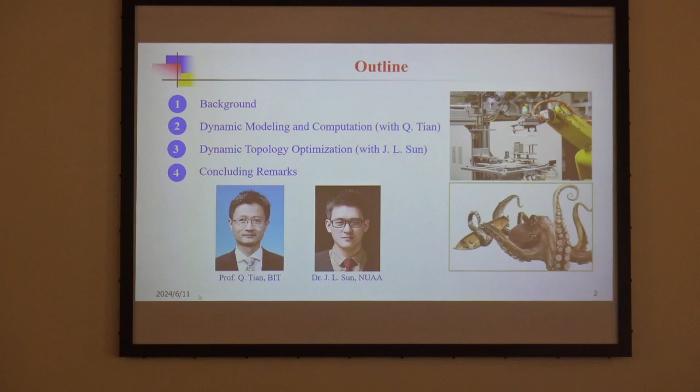As you know, conventional machines are composed of rigid components such as gears, shafts, and bearings to realize the desirable operation. However, sometimes those rigid components do not work very well. For example, in the case of a rigid manipulator of an industrial robot like this one, you need to well control the contact force if the manipulator is going to grasp a fragile workpiece. So inspired by the octopus, nowadays we are studying the soft gripper, soft manipulator, as well as soft machines, since more and more soft materials have become available.

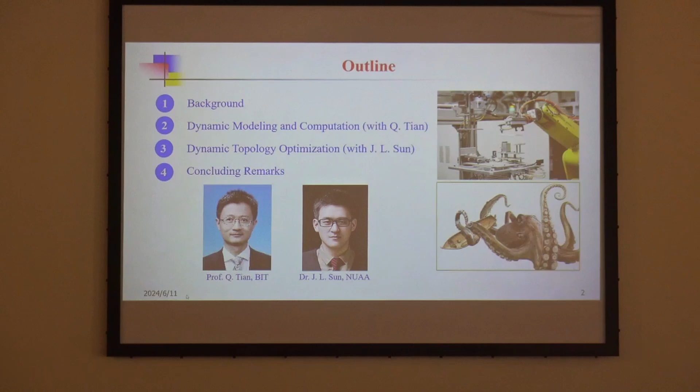Today I'm going to talk about the study on the dynamic modeling and computation with collaboration of Professor Tian in BIT and dynamic topology optimization with Dr. Sun in NUAA. Now let me begin with the basic introduction of the background. From the school name, you can guess that my lab has been focusing on aerospace structures, in particular with more and more soft materials and increasing demands for soft structures. So we are looking for the possibility to apply nonlinear dynamics to those soft machines.

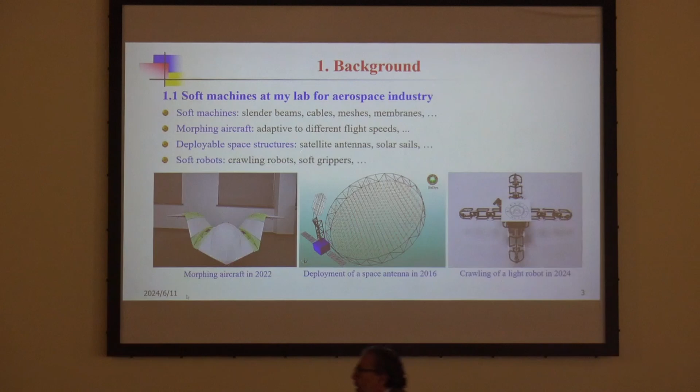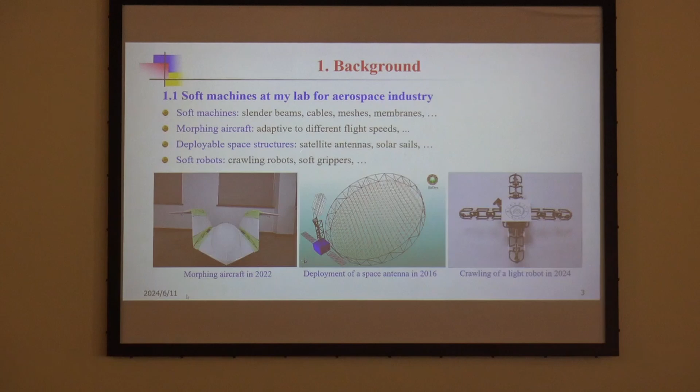For example, the left video shows you the morphing process of an aircraft adaptive to different flight speeds and different flight missions. And in the middle, this is the communication satellite in blue color. This satellite has not only very flexible solar panels, but also a very large antenna. The middle picture shows you a communication satellite having a huge antenna for telecommunication. And this antenna is so large that we cannot launch it directly. So we need to stow it into a small volume during the launch and then deploy it on orbit.

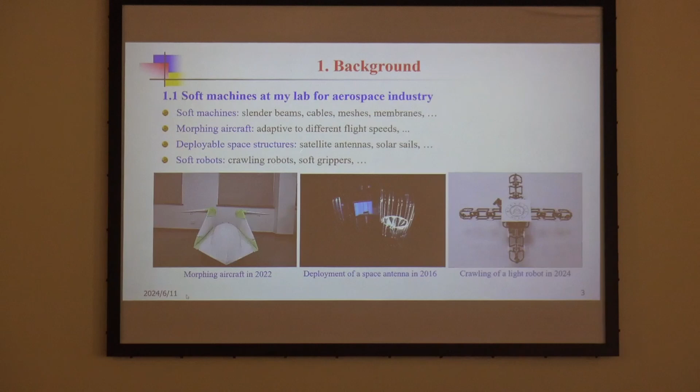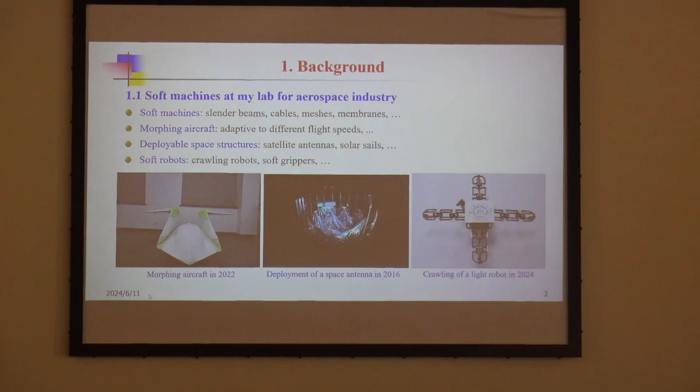To guarantee the successful deployment of the huge antenna, we did some experimental work at my lab. And here I can show you the deployment process, and you can see that the soft mesh is falling down due to the gravity. You may wonder, if the gravity vanishes on orbit, what will happen? Whether the soft mesh is falling down or goes up, left or right. Nobody knows. Later on, I will address this issue in the second part of my lecture.

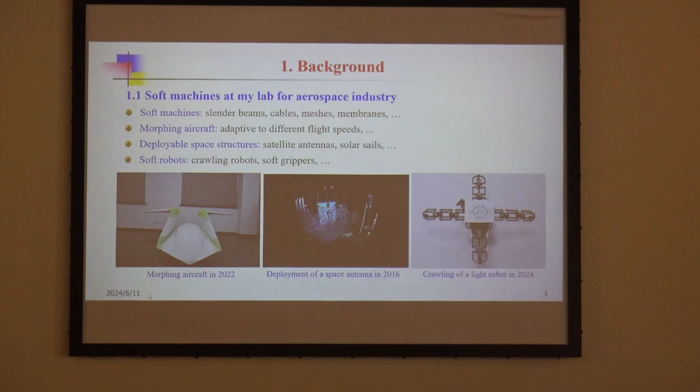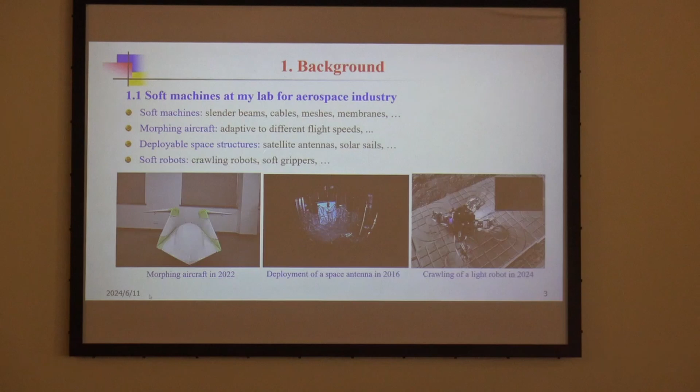And the right picture shows you a light robot very recently made by my students. This light robot is not only made of soft materials, but also subject to topology optimization to greatly reduce the weight to less than, say, 15% compared with the conventional one. So I'm going to talk about the studies for those products, and then I need to solve some great challenges.

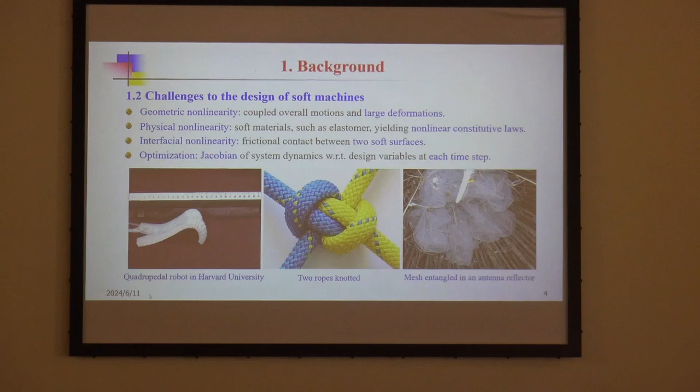So to deal with those great challenges, we need to have proper dynamic modeling and efficient and safe computation. And then based upon these techniques, it's possible for us to conduct the topology optimization, because these computations are very time-consuming due to those nonlinearities. This is the major topic today. In my lecture, I'm mainly focused on the first challenge, what I mean is geometric nonlinearity. However, I will touch upon the second one and third one in some case studies.

Okay, let's move to the second part of the lecture, talking about dynamic modeling and computation. Basically speaking, we have two kinds of methods to describe the overall motion and deformation of a flexible body. It depends on what kind of problem you are dealing with, and on your previous experience. For example, if you are in rigid body dynamics, maybe you are interested in the first type. However, people in the field of continuum mechanics may be interested in the second one. Let me give you some basic introduction.

First of all, if your body is subject to small deformation and your overall motion has a low speed of rotation, in this case you can establish a floating frame of reference, just like the top right picture. For example, you can describe the dynamic configuration or the movement of material point P positioned by vector R. And in this case, you can decompose the dynamic configuration into two parts. One is the overall motion, including the large rotation of your floating frame of reference, or called body frame. And the second part is the small deformation of the body with respect to the motion of your body

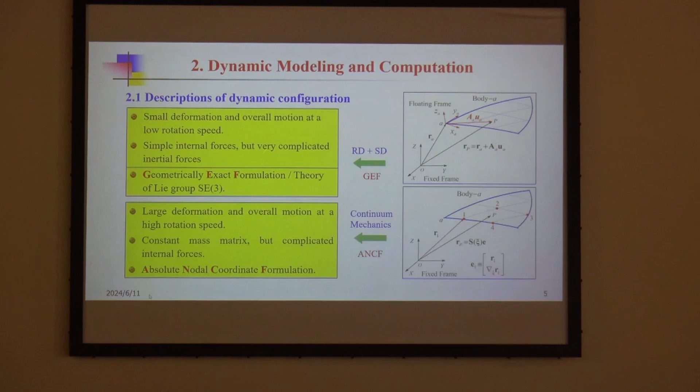Now let me talk about the second approach, the second description, which is familiar for people in continuum mechanics, because here we do not need to distinguish the overall motion and large deformation. We can use the concept of dynamic mapping between the initial configuration and current configuration, just like Professor Rugri introduced to us. And of course, if you describe the motion of a material point P here, you can use the motion of neighboring nodes. Here, I need to emphasize that this motion is absolute motion because we do not introduce any floating frame of reference, but use a fixed frame only. So this gives the idea of the absolute nodal coordinates. Here, coordinates means motion. So I call it ANCF. Today, the major content of the lecture is based upon the ANCF, so I'm going to explain it in detail.

Okay, to understand the basic idea of ANCF, let's look at the simple case of a two-dimensional slender beam. We are going to establish a nonlinear finite element method for the beam. So it's quite natural for us to look at the motion of material point P, positioned by vector R. Recalling our previous experience in the conventional beam element, we can certainly introduce, say, the cubic interpolation to describe the motion of this point P. So in matrix form, we describe R equal to matrix S multiplied by vector Q.

And here, the entries in this matrix S are the same as those in the conventional beam element. However, the coordinates in vector Q are quite different. It not only includes the conventional nodal coordinates here, for example these two and these two. In addition, we have four nodal slopes to describe or to replace the deflection angles theta i and theta k in the two nodes of your beam element.

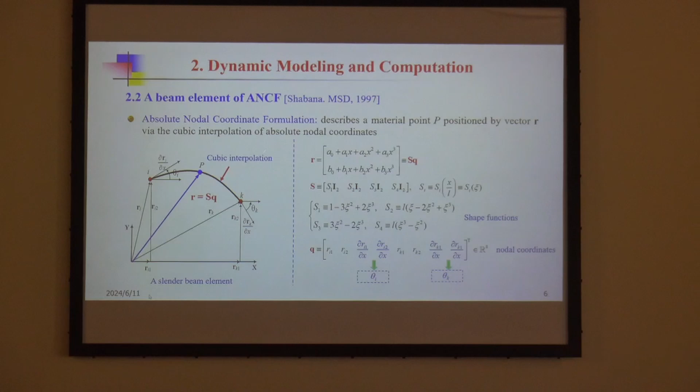Later on, I will explain the meaning of this replacement. Before going ahead, please keep in mind an important expression here: R equals S multiplied by Q, for later use. Okay, now let me talk about the replacement of slope with original deflection angle.

Actually, if we look at the left end of the node, there are two slopes. We can put these two terms into a matrix. The second matrix tells you that it is nothing but the rotation matrix of the normal direction of the cross-section of your beam element. So very simple geometry. However, in the conventional beam element, we use theta rather than sine theta. But if theta is small enough, then sine theta is equal to theta, and cosine theta is equal to 1. So that's what this approximation means.

This tells us that the ANCF can well describe the large deformation because we do not introduce any approximation in the nonlinear case. Okay, this is the first point. What about the overall motion of the beam element? That's quite easy for you to verify. You can simply let your beam element undergo a large overall motion, including translation and rotation. Then it's easy to verify that the change of the nodal coordinates is nothing but the rigid motion of the beam element itself. So this way, I can say the ANCF beam element can well describe the coupled overall motion and large deformation.

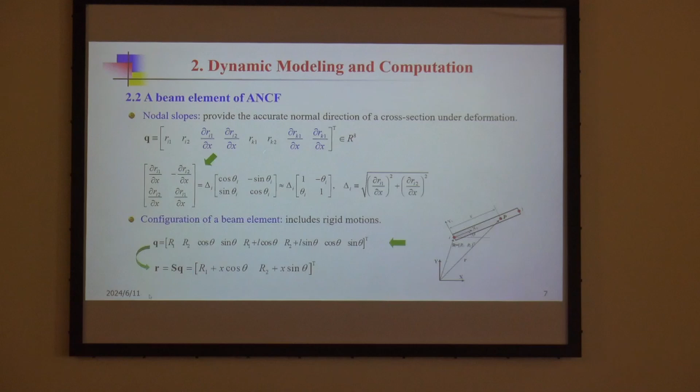That's very important. The most important expression is here: R is equal to S multiplied by Q. Then I will use it repeatedly. Following this idea, we have established, say, the three-dimensional beam elements, the thin shell element, and the solid elements, etc. For example, the 3D curved beam element we developed can be used to model not only slender beams, but also cables, meshes, etc., that are very important components in aerospace engineering.

And the thin shell elements can well describe thin plates, shells, membranes, etc. The most complicated finite element we established is the solid element here with variable length. Why do we need the length variable? Because later on, when I talk about topology optimization, we don't know the shape of the structure, the component, or even the machine. So we require the element to be changeable. In this case, each element has 8 nodes, and at each node there are 12 nodal coordinates, plus 2 other coordinates to describe the variation of the length.

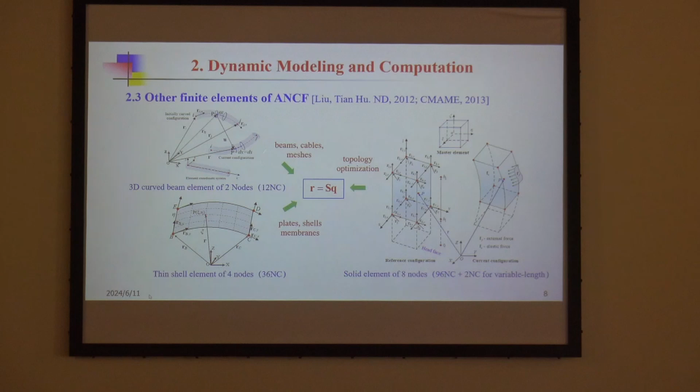Even though we have many kinds of elements, all of these elements yield this important relation: R is equal to S multiplied by Q. This is a very important expression. Then I will use it in the next slide. Okay, after we have this description of movement, we can easily derive the kinetic energy, strain energy, and the virtual work of other forces. Then we substitute these 3 quantities into the Lagrange equation of the second kind. Then we have the dynamic equation of a single beam element, like this one.

Here, I need to emphasize these 2 quantities. First, let's look at the matrix M. Because R is equal to S multiplied by Q, and S, the shape functions of the beam element, have nothing to do with time, the time only appears in Q. So we have R dot becoming Q dot, and finally you will see that M, the inertial matrix, has nothing to do with time. We have a constant mass matrix. This is the most important advantage of ANCF.

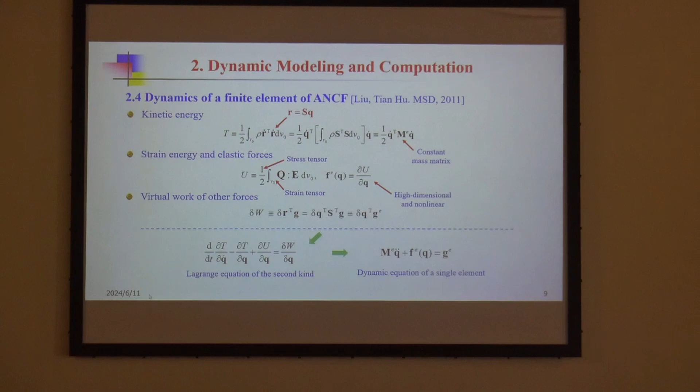However, when we get the benefit, we must pay. Pay for what? Pay for the complicated expression of the elastic forces. Here we have the strain energy for the elastic forces, where Q is the stress tensor, the second Piola-Kirchhoff stress that Professor Rugri just mentioned, and E is the Green strain tensor. So it's easy to imagine that the vector of elastic forces should be very complicated because everything is nonlinear. To deal with the problem, we need to use some basic knowledge of continuum mechanics.

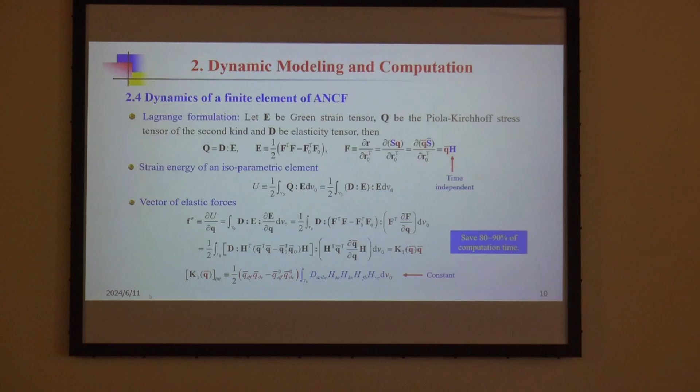During this process, maybe we need to do some tensor mathematics. However, it's not very difficult. The final result is important. After the factorization of all the quantities associated with time out of the integration, then it's easier for us to compute this integration before we start dynamic analysis. This gives you the opportunity to save a great deal of time, say 90% of time, and we only need to update the quantity related to Q bar. This is the importance of continuum mechanics. Okay, save the percentage of the computational time.

Well, regarding the machine, besides the soft components, the machine may have different kinds of joints, such as cylindrical joints and spherical joints described by algebraic equations. So after we assemble all those components and joints together, we will have a set of differential algebraic equations like this one. The first line gives you the dynamic equation in the form of differential equations, and the second one gives you an algebraic equation describing the constraints of those joints. Anyway, we need to solve this set of equations, or called the DAE, numerically.

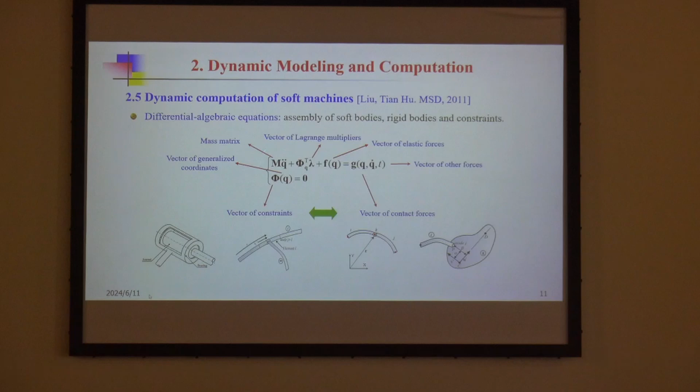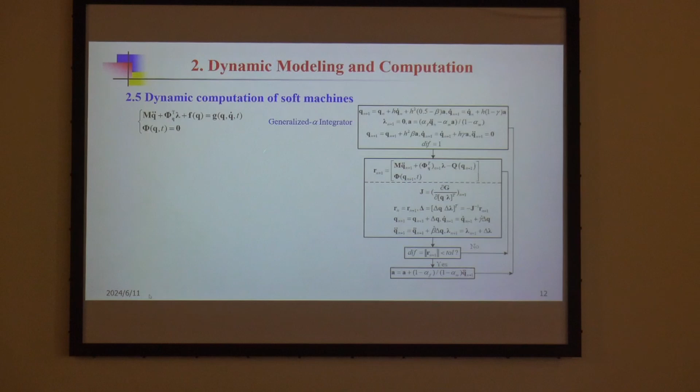Now there are several approaches available for solving this kind of DAE. Among them, I prefer to use the generalized alpha integrator. It's a kind of generalization of a well-known numeric approach. It has an important feature of easier control of numerical dissipation. Based upon the generalized alpha integration and Newton-Raphson iteration, we can transform the problem of solving a set of DAE into a simpler problem of solving a linear algebraic equation step by step in the time domain. And usually we solve this equation for delta lambda first, that's the variation of your Lagrange multipliers, and then get delta Q, that's the variation of your absolute nodal coordinates.

Of course, you can speed up this process. For example, we can remove all the internal degrees of freedom of a single component by means of the substructure method. In addition, you can also introduce parallel computation to speed up the process of solving the linear algebra. The combination of these two skills can give you the opportunity to further reduce the computational time by 90%. Remember, the first simplification reduces it to only, say, 10%, and now 10% of that. So totally, we only use, say, 1% to complete a very complicated problem.

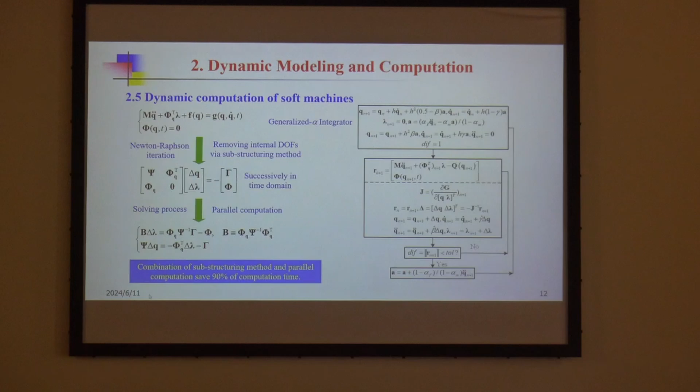Okay, now let me show you some numerical validation of the new finite element methods. We made some comparisons of the newly proposed beam elements with the solid elements in commercial software. The right figure shows you the comparison of the newly developed beam elements for beams with an I cross-section, a rectangular cross-section, and a hollow rectangular section, compared with the solid elements in ANSYS. And the left picture shows you the comparison between our result and the solid elements in Abaqus. In Abaqus, we use 1,600 solid elements to simulate the large deformation of the beam. This approach works only for, for example, 3 or pi radians. It means half of a rotation. However, the newly established beam elements plus the proposed approach of solving DAE can work for, for example, up to 45 radians, much larger than the commercial software. So I can say this approach is superior to the solid elements in Abaqus and saves you a lot of computational time.

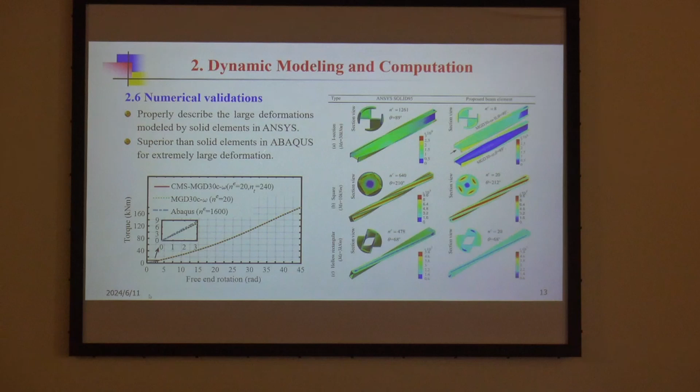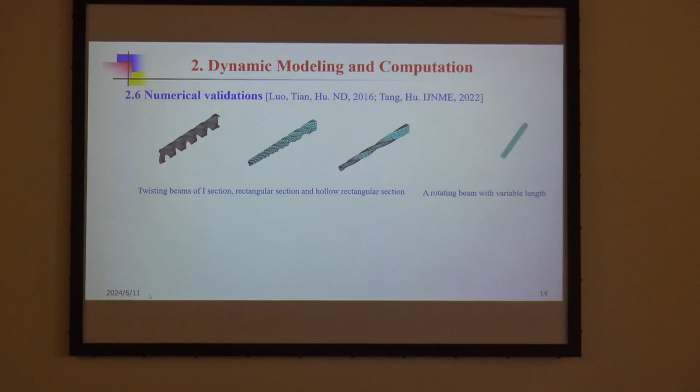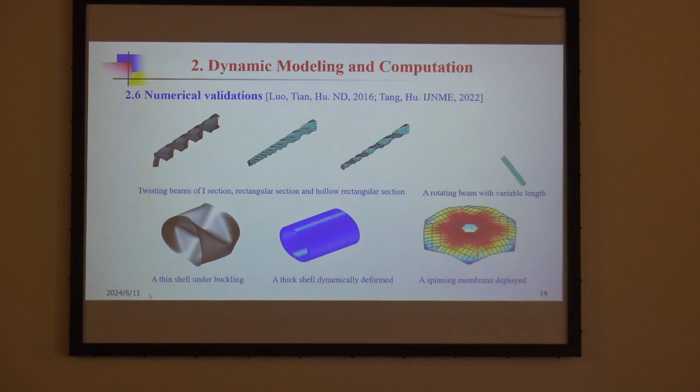Here, let me show you some, say, dynamic deformation. This is the twisting beam of I section, rectangular section, and hollow rectangular section. And here is the spinning process of a rotating beam with a variable length. This is a quite important case for the space industries. And here is a thin shell subject to buckling, and a thick shell subject to dynamic deformation, and the spinning membrane deployment for the case of solar applications, solar energy power generation. Okay.

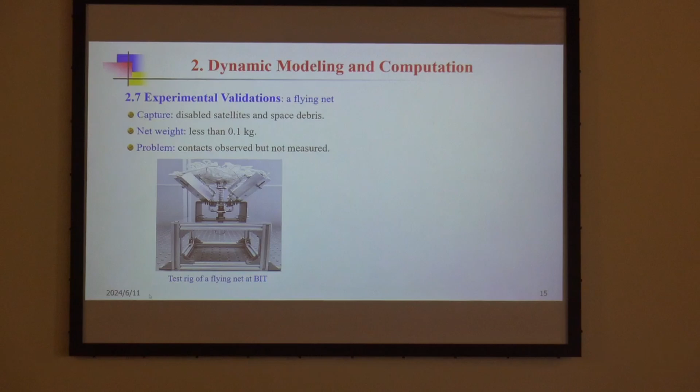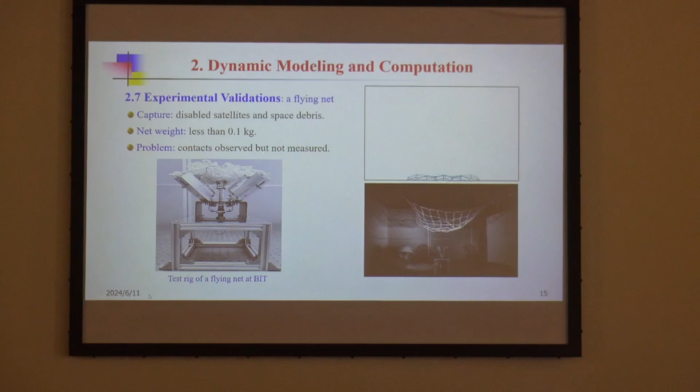Furthermore, let me show you some experimental validation. Here is the simple test rig developed at my lab. This is the flying net, very useful for capturing, say, disabled satellites or space debris. And the net is composed of a lot of strings and very, very light. And let me show you the videos. Unfortunately, the two videos are not synchronized, but on my own computer, the net is flying synchronously in numerical simulation and experimental studies. This is a relatively easy computation. You may wonder whether I properly describe the contact between these strings. Yes, that's a very tough problem, not only for computation, but also for measurement.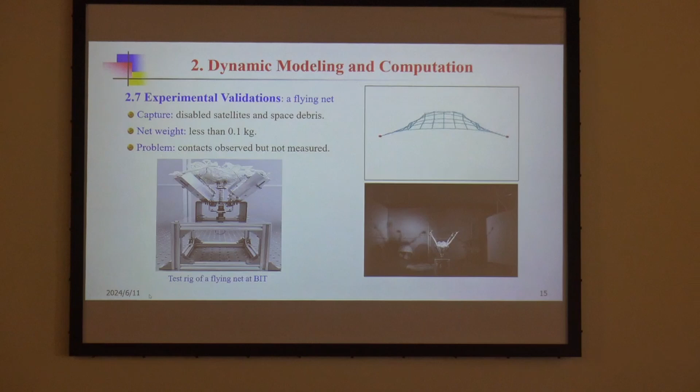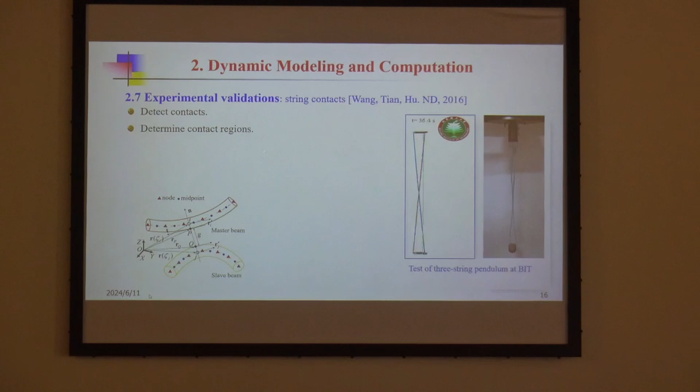So let me show you a relatively simple test rig. And here the video shows you that the motor drives the top disk to spin, and the bottom disk connected with 3 strings rotates too. And the motions of these 2 disks are not synchronized because of the inertia of the bottom disk. So you can see the 3 strings get in touch from time to time and have frictional contact. How to deal with this problem in computation? We establish the beam model for those ropes, and we can detect whether they get in contact according to the distance, say, determine the contact region after they get in contact. As I mentioned before, the contact now is not the, say, point-to-point contact, but region-to-region contact between two soft bodies.

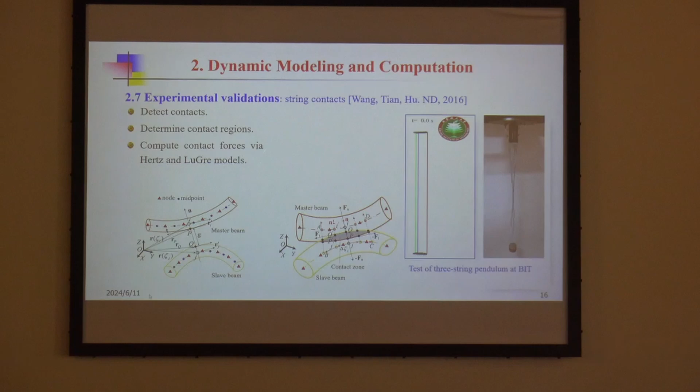So we need to accurately determine how large the contact region is, and then we can compute the contact forces. Say for the normal force, we use the Hertz theory, and for the tangential force, we use the LuGre model to well describe the static friction, in particular the well-known stick-slip effects. This figure shows you a comparison between the angular velocity of the bottom disks, and you can see the computational results and experimental results get very good agreement, confirming the computation of contacts.

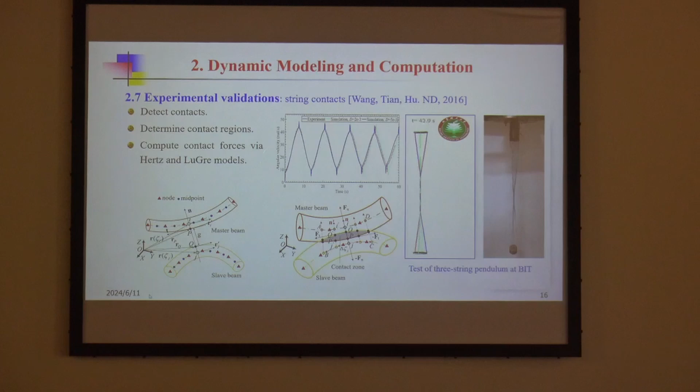Now let me show you a more difficult problem: contacts. Here is the inflation of a pneumatic chamber. That's a very important actuator in soft machines. The chamber is made of very soft materials with Young's modulus of only, say, 1 megapascal, very soft. Initially, the chamber was bent into a circle, and then we let the air flow in and the pressure, 500 pascal, inflate it. Here, I give you the deployment process. You can see the very complex contacts of the chamber itself.

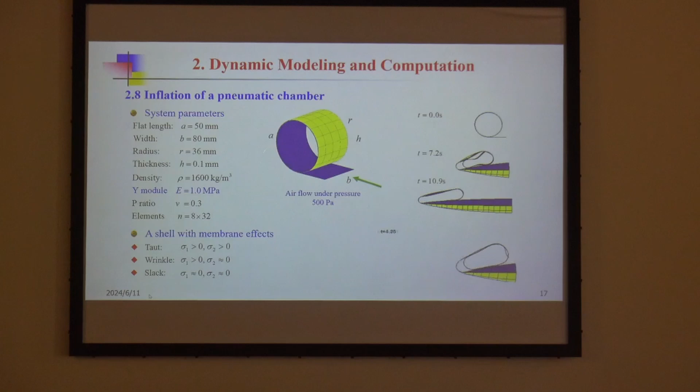To look at the case in detail, I'll give you 3 specific moments, and you can see the contacts really happen, not only point to point, but region to region. Okay, when we have confirmed everything of our approach, then we deal with a real engineering problem, talking about the communication satellite. In the very beginning, the top figure shows you the satellite in blue color. It has 2 solar panels in gray color and a microwave feed source in white color, supported by a deployable truss in black color.

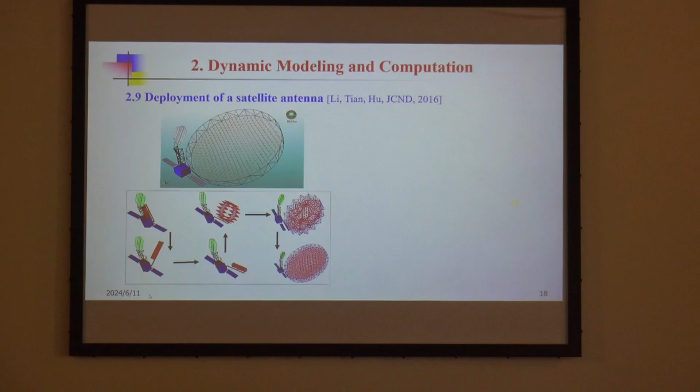The most important thing is that the satellite has a huge antenna, much larger than the satellite itself. As I mentioned, we have to study this antenna before and during launch, and then let it deploy in orbit. So we use the beam elements and plate elements of ANCF to model this real engineering problem. And the bottom picture shows you the deployment sequence step by step. If you look at the video, it can show you the process vividly. Here I do not include the deployment of the soft mesh because it's too complicated. Let me demonstrate it later on.

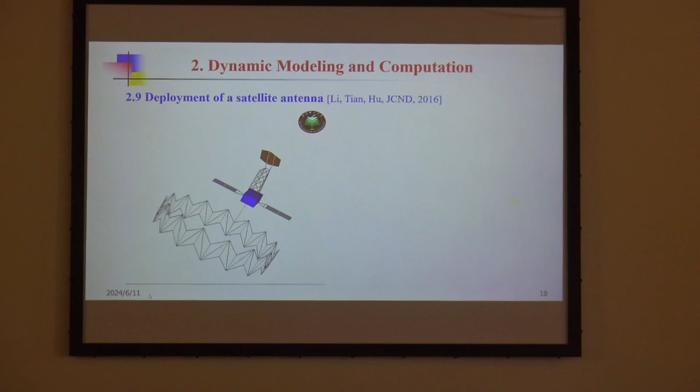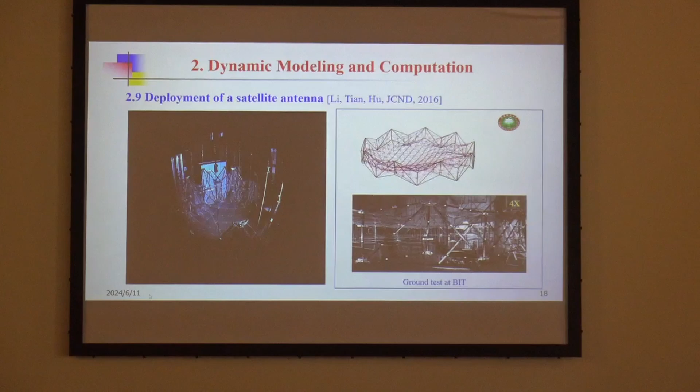So let me show you the comparison between the numerical simulation and the ground test. Unfortunately, the 2 videos are not synchronized due to, say, the projector. On my own laptop computer, you can make a very good comparison of these two processes, predicted in computation and measured in experiment. Anyway, to see the comparison result, I give you the results at 4 specific moments, and if you compare the bottom figure and the top figure, you can see they really get good agreement.

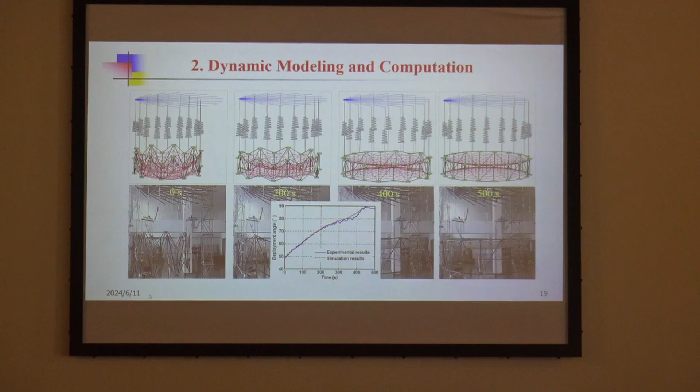And finally, I give you a figure that shows the comparison of the deployed angle, measured and computed. They really get agreement, except for the final stage, where there is some fluctuation because of the friction in the joints. We cannot control those frictions very well in the experiment. Okay, this is the end of the second part, and now let me talk about the third part.

That is the dynamic topology optimization. Topology optimization means how to get the best distribution of a given material, for example, for a single structure like a cantilever beam, say this one. Of course, we do not have any suspended cables. I use a simplified case here.

We need to allocate our material in this gray domain, which we call the design domain. To simplify the problem, we mesh the domain into a lot of rectangular cells, and we can determine how much material we need to put into the specific cells. For example, if a cell e is fully occupied by the material, then I define a parameter rho_e to be 1. If your cell has nothing, meaning it's void without any material, then I put rho_e to be 0. So here rho_e is the design variable, or physically the relative density of your material, of your structure.

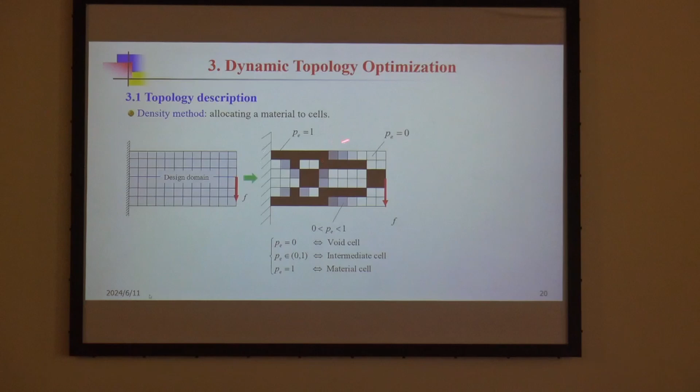Of course, during the topology optimization, you must have some cells with lower density, not black and not white, but gray, in those cases. So finally, we have results like this. The top one looks like a checkerboard. Why?

An important reason that we do not have enough fine mesh. If you have fine mesh, then the things can be improved. However, it's not easy for us to do so, because finally we try to get the middle one. The number of design variables is just the number of the cells, and it determines the computation cost. So it's not possible for us to use a humongous number of cells to get the result.

Then how to do? You may quite straightforwardly ask me, is it possible for us to have the final result like this one? It has only 8 bars or 8 components. The answer is yes and no. Let me say no first, because you don't know the geometric shape before your optimization. You don't know how many components, where they are, and what the shapes are. So why can I say yes?

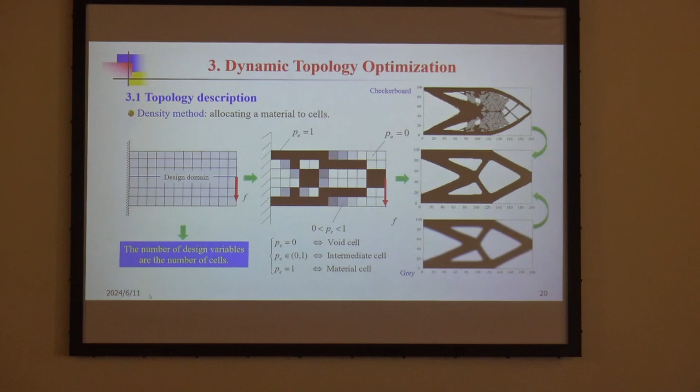Because this result reminds us of the possibility that we can replace those rectangular cells by means of a few components, but with a changeable place, changeable orientation, changeable size, and changeable shapes. If this is true, we can certainly greatly reduce the number of design variables. This gives us the concept of moving morphable components, or MMC for short.

Now, in this figure, we simply replace the original rectangular cells by using a much fewer number of components. For example, if we look at the component omega I, actually we need only, say, the position of the geometric center, the orientation theta I, and the length A I and height B I. See, we only use 5 parameters to determine the right position, right angle, right shape, and right size.

Meanwhile, we can introduce a function related to this omega I to determine whether we allocate mass. So the union of all those functions gives us the possibility to describe the topology information of the structure you are going to optimize. And the final result should be this one. During this process, maybe we can remove some components. Here, the components have a changeable size, changeable place, and changeable state. If you imagine it's kind of the procedure of playing the toy Lego made in Denmark, the Lego should be moving and morphing and finally get the final optimization.

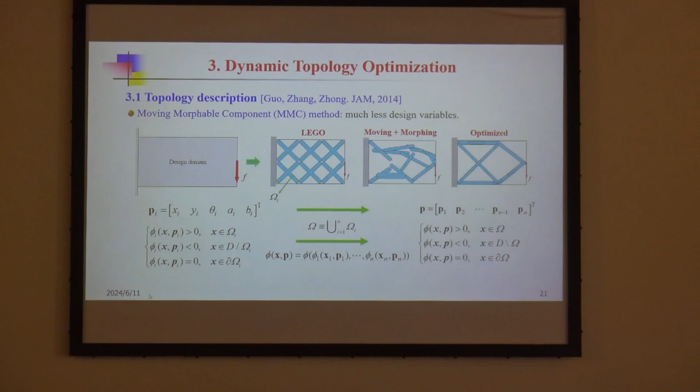Okay, based upon this knowledge about topology optimization, that is for the static problem, let's talk about the dynamic problem. During the dynamic topology optimization, I need to address two important issues. First is that we have transformed the topology optimization to a parametric optimization by means of the vector of a lot of design variables. In addition, in each update procedure, we need to solve this equation. This is the original DAE, for each time step, for each update of your parameters. This is certainly very time consuming compared with the static problem.

One skill to reduce the computational time is to keep the computation of this ODE for each step of your updated design parameters. However, if you use any gradient-based method, for example, the standard method of moving asymptotes, you need to calculate the Jacobian of the system dynamics with respect to the change of your design variables. In this step, I simply replace this dynamic equation with an equivalent static one to save the time of computing those Jacobians, or called dynamic sensitivities. This gives you a great opportunity to save computational time.

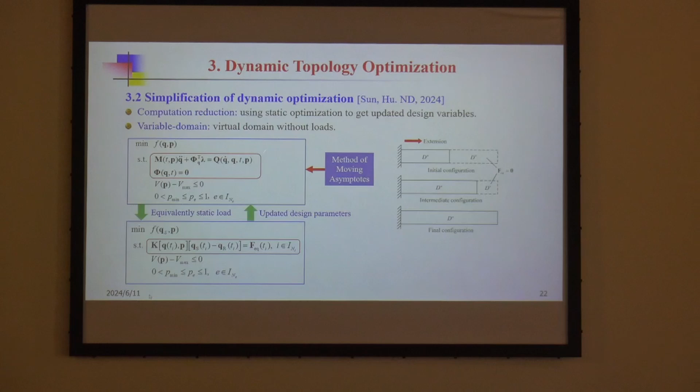The second issue compared with the static problem is that your design domain may not be fixed. It may be changeable with time. If this is the case, we can introduce the idea of virtual domain. In the virtual domain, where your structure has not deployed yet, you can simply let all the forces vanish or be zero. This also simplifies your approach. Okay, this way we can do some real optimization.

Here I give you two examples. The first example is the right picture in my very beginning introduction. It's a very light soft robot made by some students in Nanjing last semester. The robot has one body and 4 legs, and each leg has 3 links connected by 2 Cardan joints. The major task of the optimization is to reduce the weight of both the body and all these legs. So we set a volume ratio of 0.15. That is, we are going to remove 85% of the mass out of the conceptual design. The right 2 pictures show you the optimization process with iteration again and again, and finally we get a satisfactory shape of the body and of the legs.

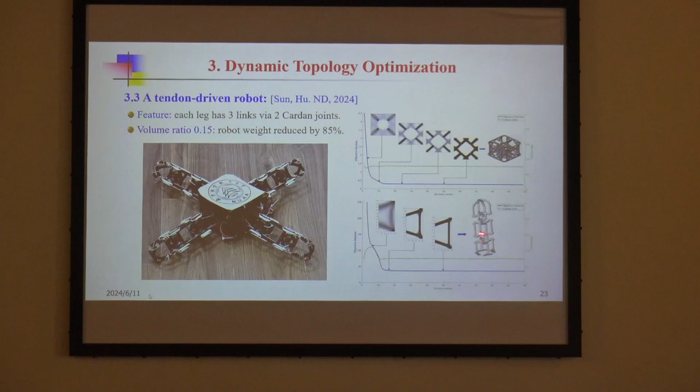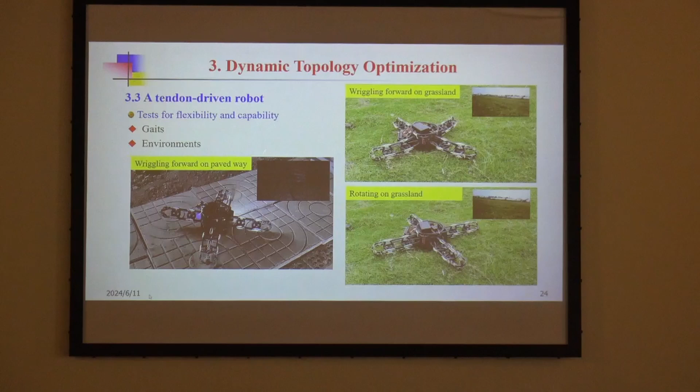And here are some videos to show you the flexibility and capability of the small robot. It's very light. Okay, this looks like exercise for some toy machines.

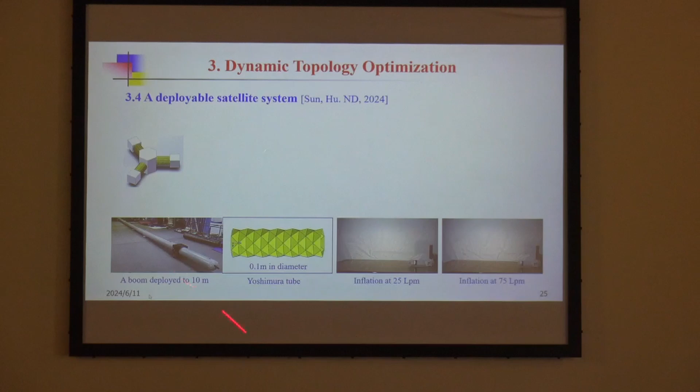Here, the video shows you the deployment process due to the inflation of the beams. What is the use of this satellite system? Let us look at the video.

And here, in the center satellite, there is a microwave feed source. It sends out the electromagnetic waves to your target. Then 3 receivers in 3 sub-satellites receive the reflected microwaves. This way, the satellite becomes a radar with a very long baseline, which can be used to detect a small target in the sky, other planets, for example, in very high resolution.

For this purpose, we must reduce the vibrations of all these 4 satellites as much as possible. This is very important work for dynamic analysis and topology optimization. In the very beginning of the study, we look at the case of a small model. The boom deployed only, say, 10 meters long rather than the real case, and we use Yoshimura tube to construct the booms, and we did some experimental studies to testify the vibration and deformation at different inflation rates.

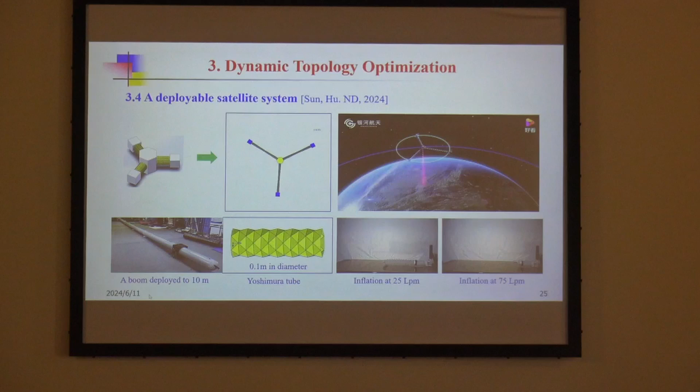And here you can see the video. If inflation is at 25 liter per minute, then it moves forward, but upward a little bit. And then if we let inflation be much faster, then the deformation becomes very large together with some strong vibration. So is it possible for us to design the booms based on the concept of topology optimization? Let's look at the case.

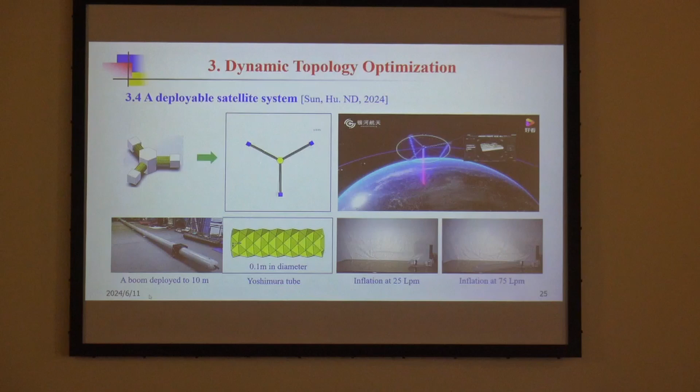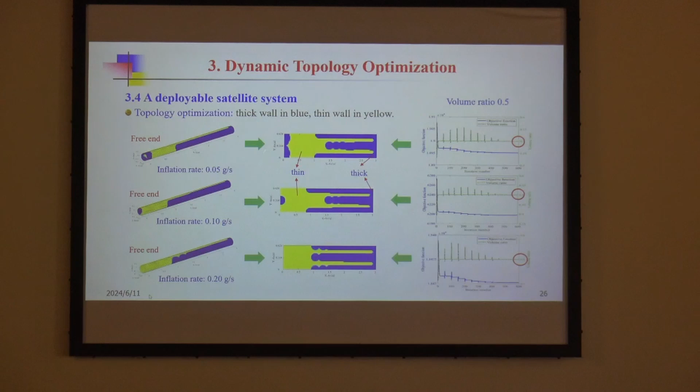And the left 3 pictures show you the optimized shape of this boom. Here, the blue color means the thick wall, and the yellow color means thin wall. So you can see the blue color goes to the clamped end and horizontal plane, and the yellow color goes to the free end and the vertical plane. You can see the optimization result more clearly if you cut the booms along its axis. This way you can see in these 3 figures quite clearly in what place the wall is thick and in other places the wall is thin, and that's what we need.

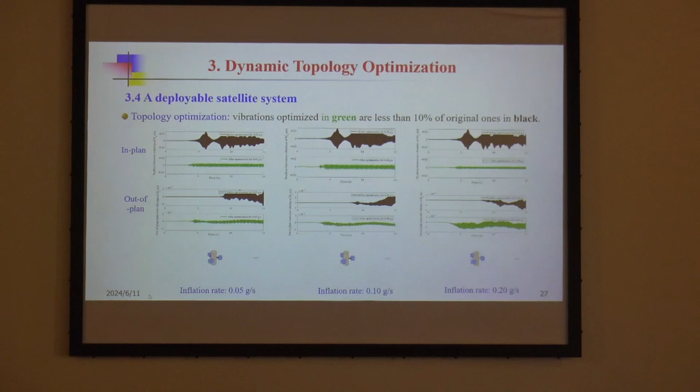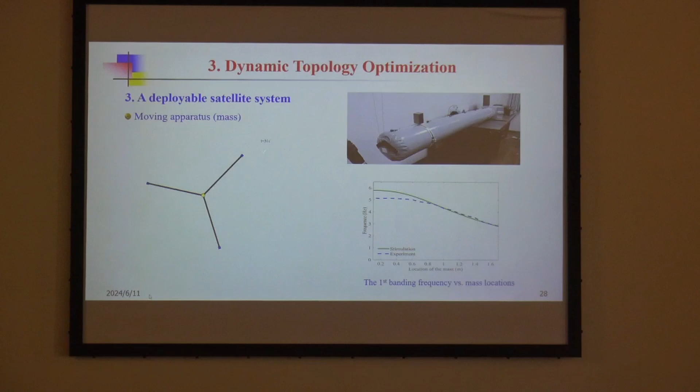the variation. Here, for example, the bottom figure gives you a comparison of the first bending frequency with different mass locations. Further studies showed us that the high order frequencies behave quite complicatedly. For example, with the increase of the distance between the lumped mass and the central satellite, the second frequency of bending and the first frequency of torsion will change their order, as you can see in this view here.

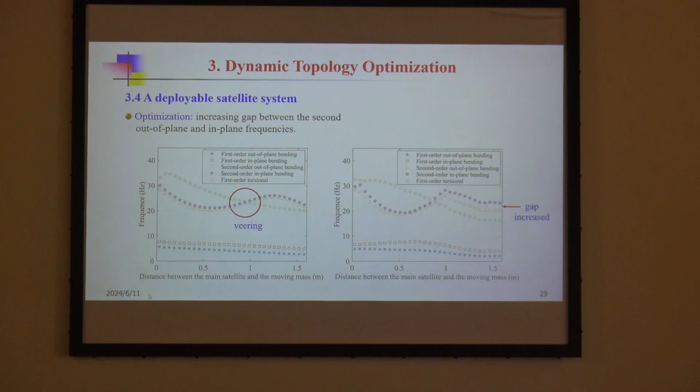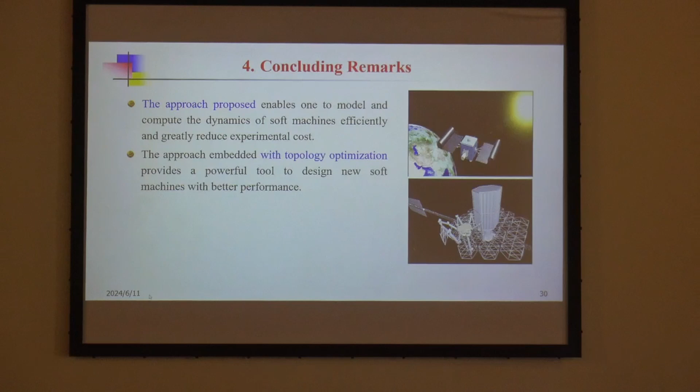Now, before concluding my presentation, I'm going to summarize in 3 sentences. The first is that the approach we proposed enables one to model and compute the complicated nonlinear dynamics of soft machines in a very efficient way and greatly reduces the experimental study. The second, if we combine this approach with topology optimization, then it gives you a very powerful tool to design soft machines in practice. Furthermore, nowadays we are looking for possibilities for some even more challenging space problems, such as

the morphable and reconfigurable space structures. If the space structure is too large, for example, over 100 meters, we cannot deploy it further. We must assemble the modularized space structures step by step by means of space robots. So these problems give us a lot of new opportunities and also great challenges. So we are studying the advanced integration of nonlinear mechanics and dynamic control, as well as artificial intelligence embedded into those approaches to solve those tough problems in the future.